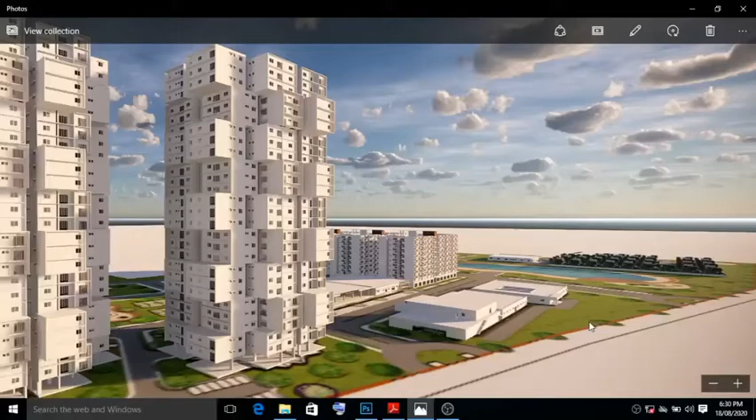Hi, I'm D. Revati. My thesis topic is Green Integrated Township. I want to start my topic with the need for the township.

A green building places a high priority on health, environmental, and resource conservation performance over its life cycle. Major innovations took place with the advent of the green building concept. To have a green building concept, we should look after the optimum use of energy power,

water conservation, solid and water waste management, its treatment and reuse, energy efficient transport system, and finally efficient building system planning. If all the buildings in urban areas were made to adopt green building concepts, India could save more than 8400 megawatts of power, which is enough to light half of Delhi or 5.5 lakh homes a year, according to the estimates by TERI.

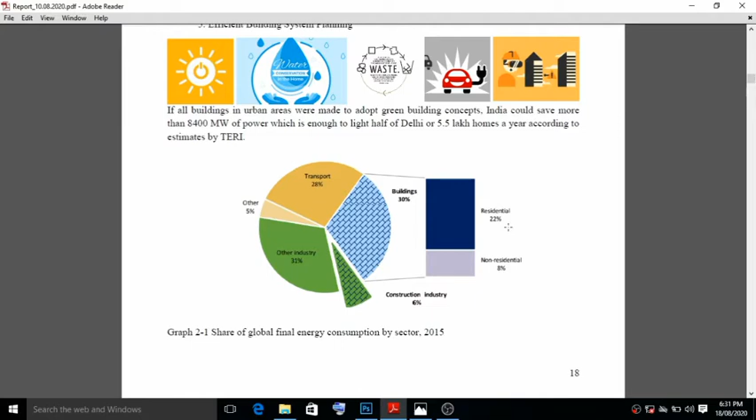This graph shows the energy consumption by the building sector is 30%, and most of it was occupied by residential. That is why my study focus is on residential, and non-residential is 8%. So further, we look about CO2 emissions.

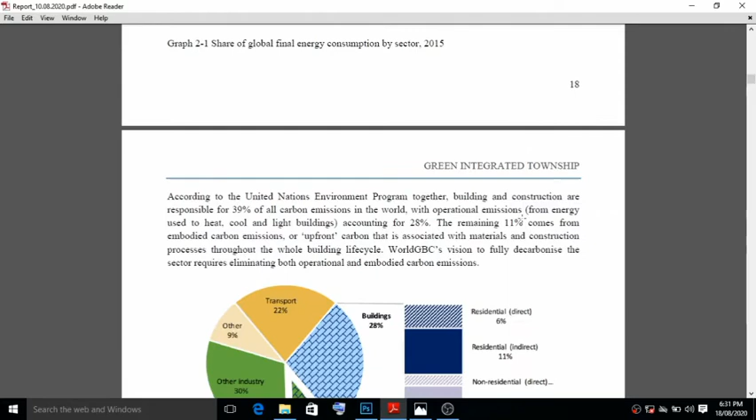According to the United Nations Environment Program, building and construction together are responsible for 39% of all carbon emissions in the world, with direct operational emissions accounting for 28%, and the remaining 11% coming from embodied carbon emissions, or upfront carbon, associated with materials and construction processes throughout the whole building life cycle.

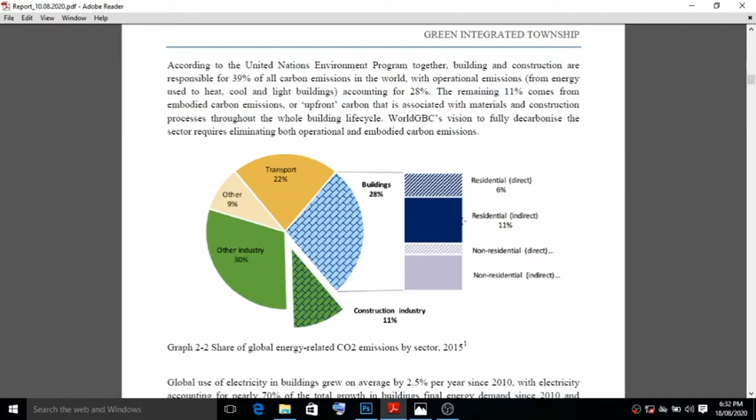This graph is the evidence for it, which shows the building and construction sector is responsible for 28% operational emissions, and 11% embodied carbon emissions in the residential sector.

However, when the building sector's electricity demand growth is accounted for, the net result is that building related emissions from upstream power have remained practically constant since 2010.

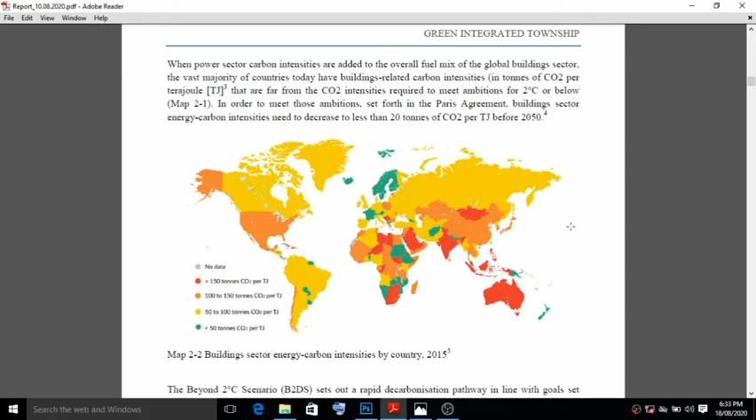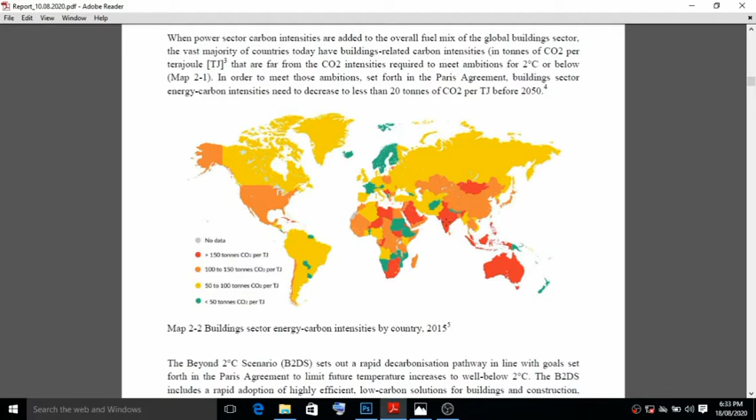There is a Paris Agreement with ambitions for building sector energy carbon intensities, which need to be decreased to less than 20 tons of carbon dioxide per terajoule before 2050. But in this map, it is recorded that the energy carbon intensity in India is greater than 150 tons carbon dioxide per terajoule, which is a serious condition.

So they came up with the 'beyond 2 degree' scenario, which is achieved by low carbon solutions: adoption of highly efficient and low carbon solutions for buildings and construction, widespread application of building energy codes, broad scale renovation of existing building stocks, aggressive deployment of high performance technologies, and a strategic shift away from fossil fuel use in buildings.

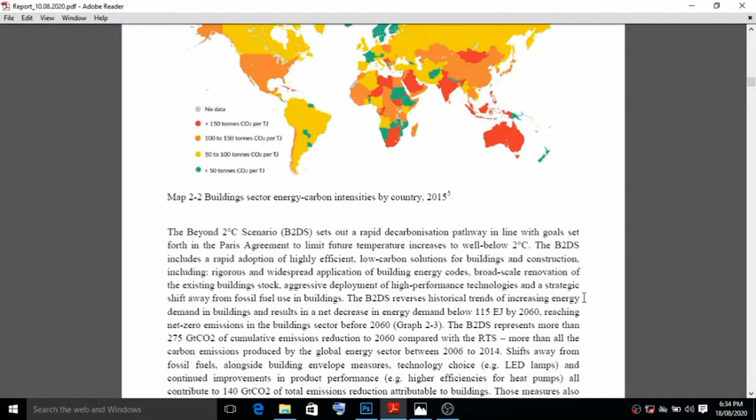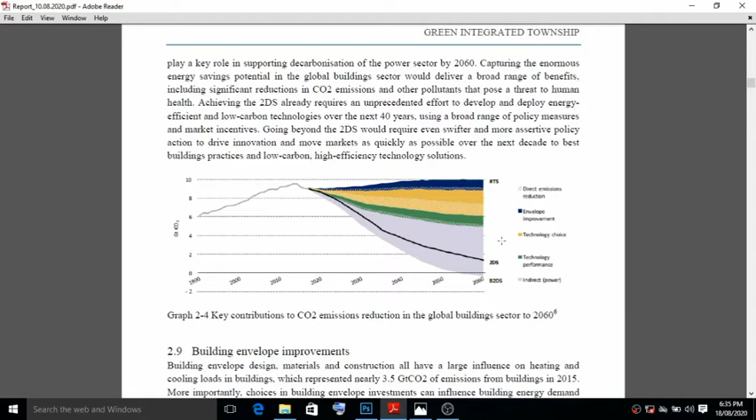So the first one is building envelope improvement. Building envelope design, materials and construction all have a large influence on heating and cooling loads in buildings, which represented nearly 3.5 GT of carbon dioxide emissions from buildings in 2015.

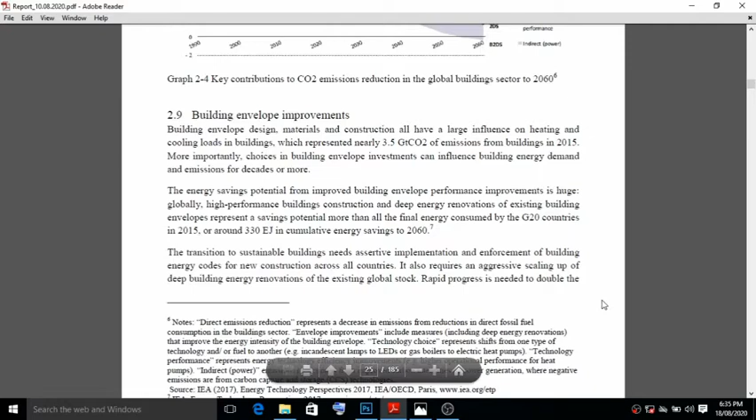So the transition to sustainable buildings needs assertive implementation and enforcement of building energy codes for new construction across all countries. It also requires an aggressive scaling up of deep building energy renovations of the existing global stock.

Then the technology choice - there are two things. First of all, we look at technology choice importance, which has a ripple effect on the type of energy and the total energy consumed in the buildings.

So there are two graphs showing final energy used by equipment type and equipment shares - the amount of energy savings due to equipment type over the years. In 2014, energy usage was due to higher percentages of fossil fuel equipment, conventional electric equipment, while efficient electric equipment was much lesser, and district heating and cooling and renewables were much lesser than conventional electric equipment.

This was totally changed with the vision of 2060: to reduce fossil fuel equipment by a lesser amount, and also conventional electric equipment, while using efficient electric equipment in greater amounts, and also district heating, cooling and renewables at higher levels.

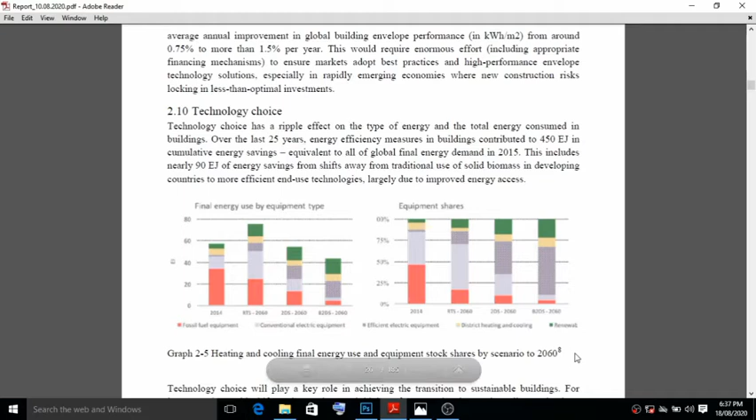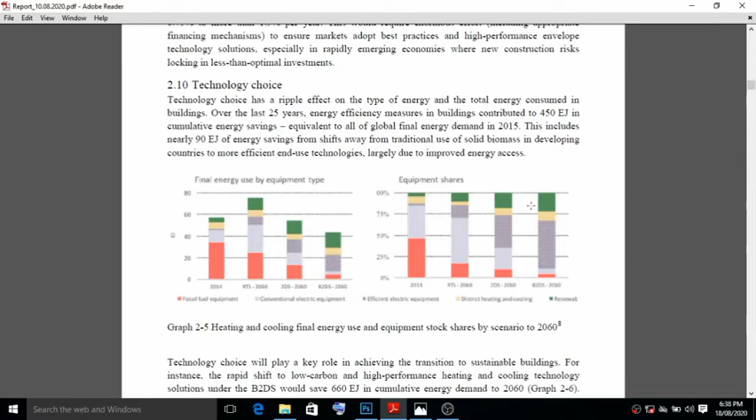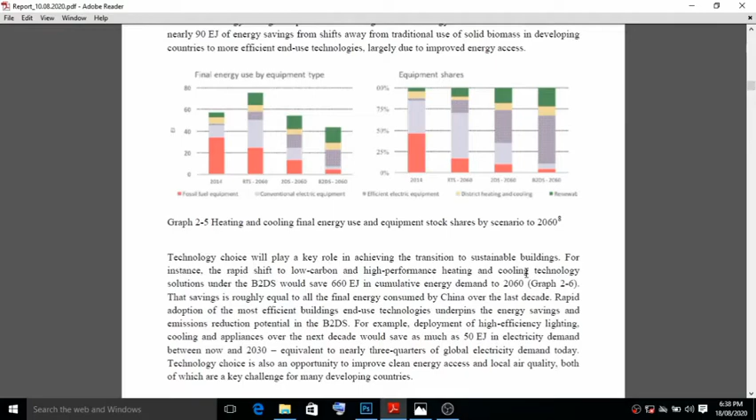This is the technology choice they have chosen to achieve the below 2 degrees Celsius scenario. And finally, the technology performance.

Improving technology performance is a key component of the transition to sustainable buildings. Efficiency improvements, including building envelope measures, represent nearly 2,400 EJ in cumulative energy offsets to 2060, more than all the final energy consumed by the global buildings. Yet concerted effort is needed to support research and development, best practice sharing, and international collaboration to accelerate the development of better building technologies and bring them to market at affordable prices.

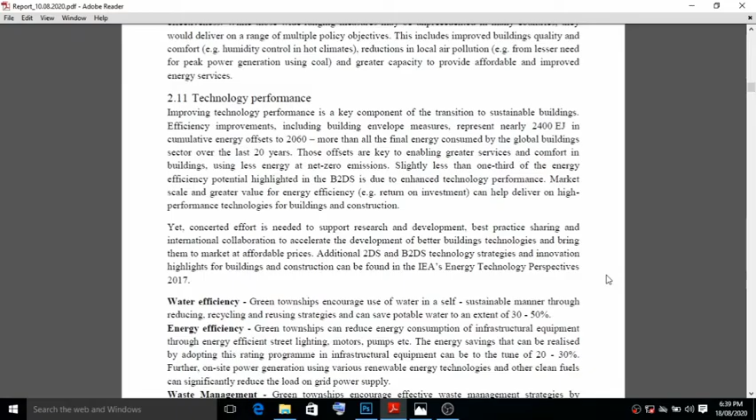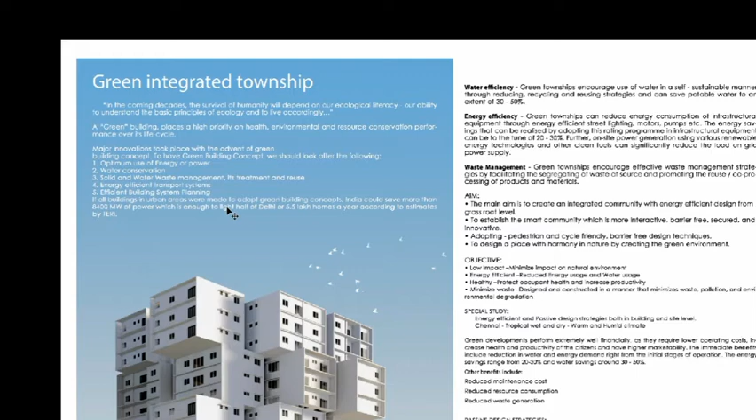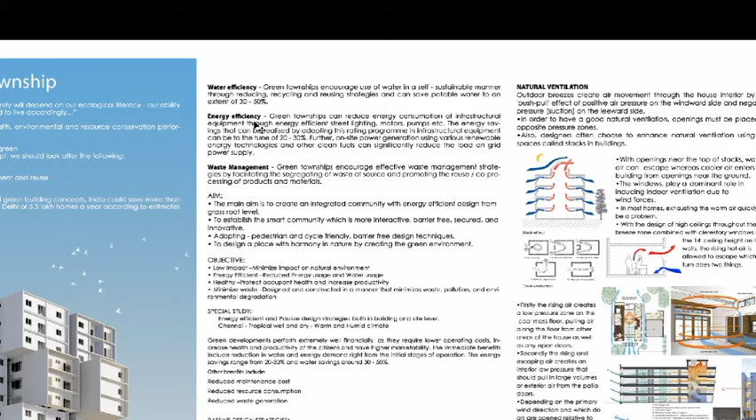In the coming decades, the survival of humanity will depend on our ecological literacy and our ability to understand basic principles of ecology and to live accordingly. So in a green building, there are three major things usually: water efficiency, energy efficiency, and waste management. If we solve these three things in our design, it is considered a green building concept.

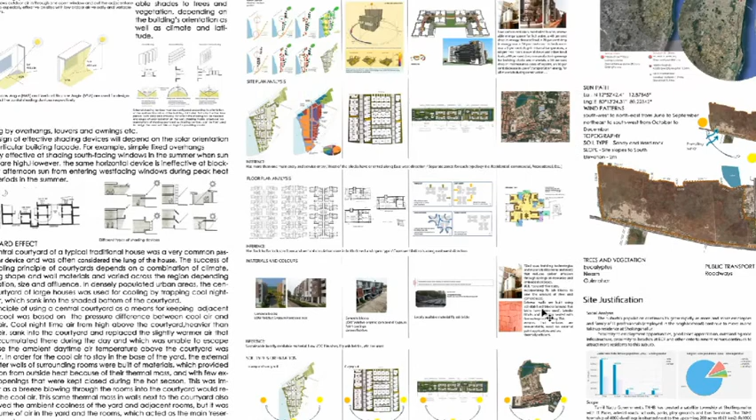So next we move on to comparative analysis of case studies. I have done 4 case studies: ITC Bhadrachalam, Andhra Pradesh; BCIL TZed Homes Bangalore; ETA Tech City at Sriperumbathur; and Luxury Villas at Kolapakkam.

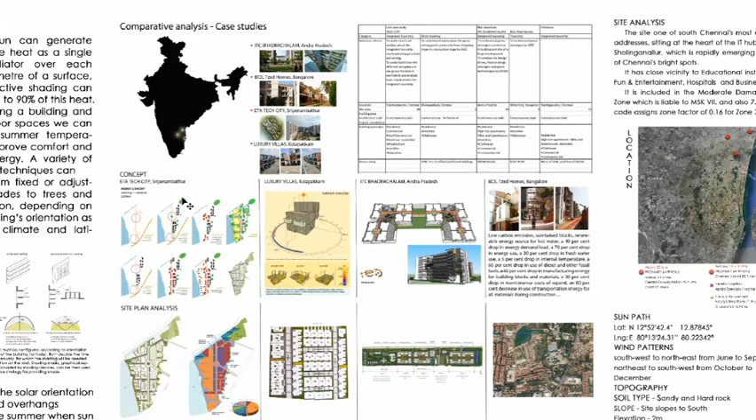ETA Tech City at Sriperumbathur is an 82 acre project, and the concept is based on the neighborhood principle. They created a path, an entrance and a central node, and a green landmark, then the districts of residential and commercial buildings, then a luxury villa district, a luxury residential district along the lake, and finally a neighborhood. Each neighborhood has a central green space. This is the concept of ETA Tech City.

The luxury villas have a good amount of natural lighting, up to 108 lux, which is more than enough for vision, enough to light a space, and a good amount of cross ventilation is carried out in all the floors. This was the concept of luxury villas, and it is a green rated building, IGBC green rated, gold rated building.

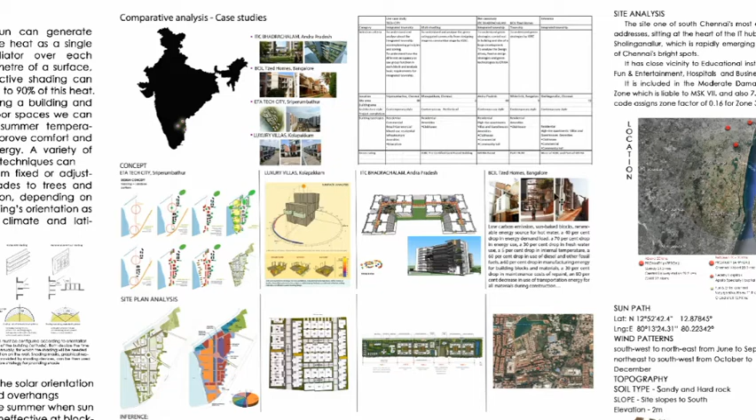BCIL TZed Homes Bangalore uses low carbon emissive materials, and it is a zero water site where they don't need water from outside. They use their own water, recycling, reusing and harvesting it in a whole cycle. They don't need extra water from outside - that is the specialty of this site.

Site plan analysis: since the site area is bigger, almost all the site has 2 entries and a service entry. All the major roads and wide roads are always aligned on the north-south orientation, and the blocks were oriented on the east-west direction, so that the longer facade faces north and south, and the solar radiation exposure of the vertical surfaces on the east and west is lesser, so the cooling effects for cooling the space is lesser.

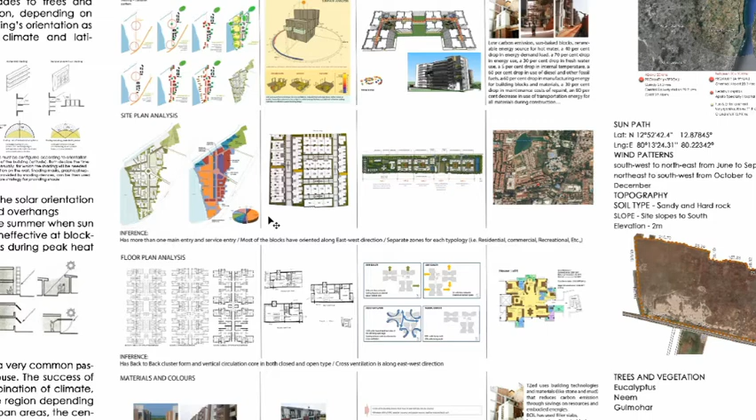Floor plan analysis: the blocks are designed as a back to back cluster with a vertical core in both open case and closed type case, and the blocks were oriented east-west also to channelize the wind direction, where the wind direction is from west to east. So on all the plans.

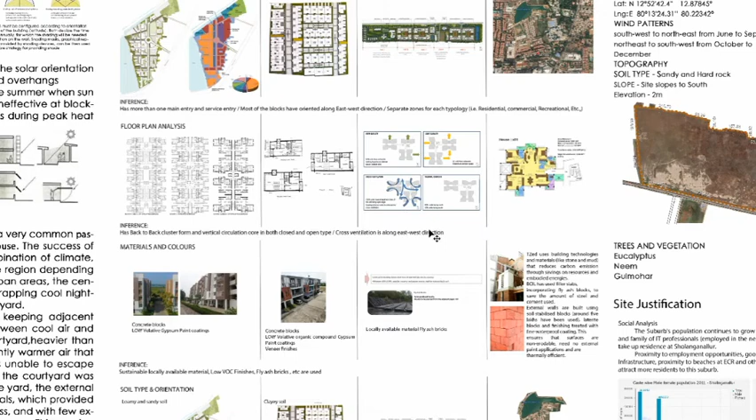Materials and colors: they have used sustainable local materials, low VOC and fly ash bricks, which have low transmittance of solar energy and low U value. In the site they have used low carbon emission materials, fly ash blocks, and low volatile organic compound gypsum paints.

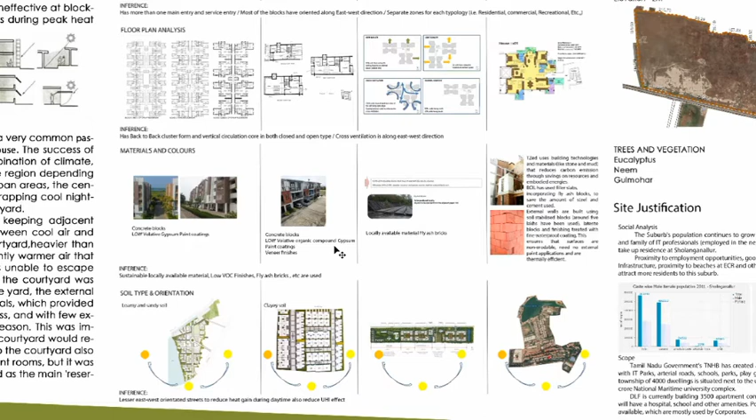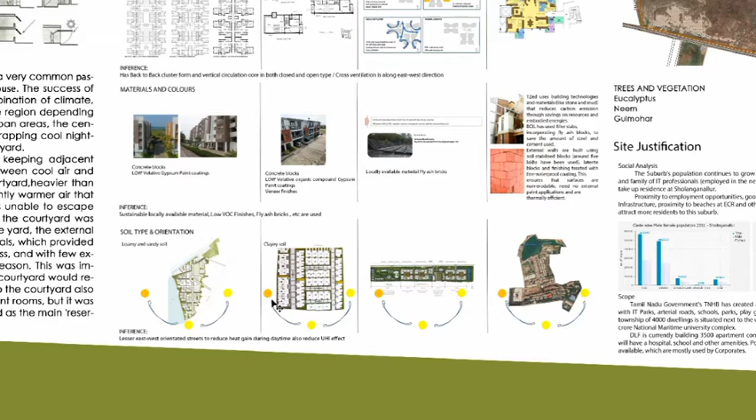Soil type and orientation: the site streets are oriented, as I said, majorly north and south direction, with lesser east-west oriented streets to reduce the heat gains through those streets. This also has an impact on the UHI effects. This is a very major point from the soil type and orientation.

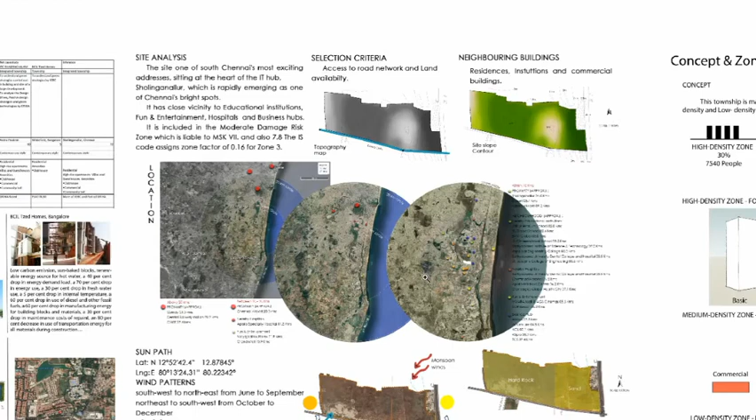Site analysis: the site is one of South Chennai's most exciting addresses, sitting at the heart of the IT hub, Sholinganallur, which is rapidly emerging as one of Chennai's bright spots. It has close vicinity to educational institutes, fun and entertainment, hospitals, and business hubs. It is included in the moderate damage risk zone, liable to MSK 7 and also 7.8. The IS code assigns a zone factor of 0.16 for zone 3, and the selection criteria is land availability and access to road network.

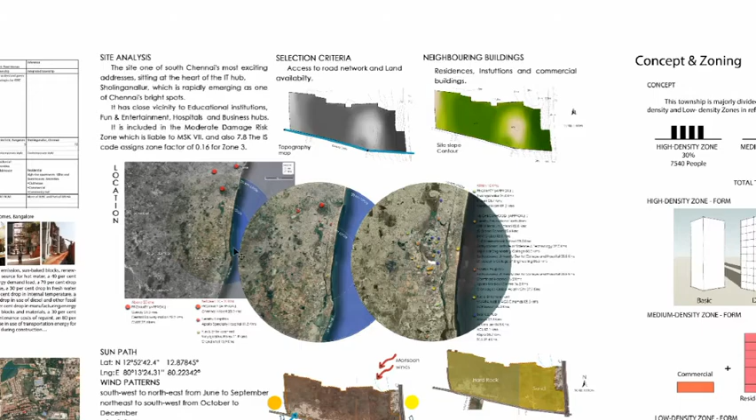This is a 20 kilometer and 10 kilometer circle from the site.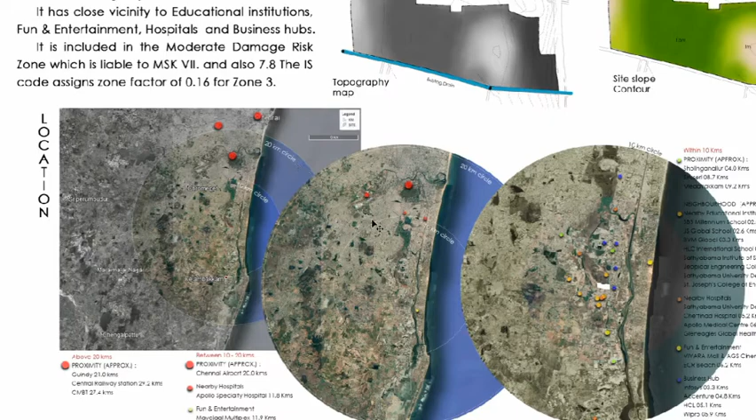So we have Guindy and Central Railway Station, CMBT and Central Railway Station outside the 20 kilometer circle. And inside, in between the 10 and 20 kilometer circle, we have airport and Guindy Junction, and also Apollo Hospital and fun and entertainment.

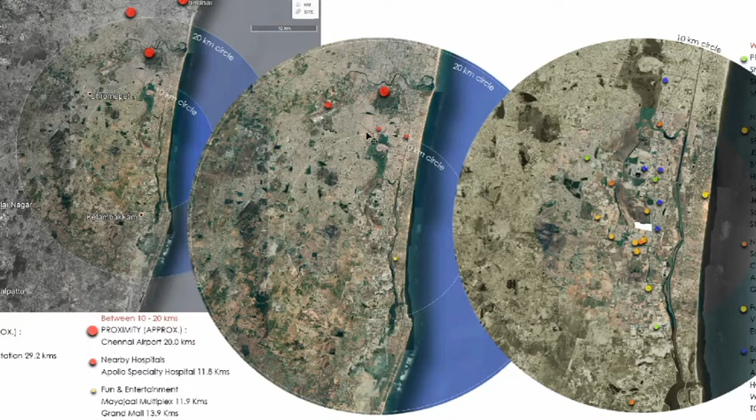Inside the 10 kilometer circle, we have junctions like Sholinganallur, Medavakkam, and Siruseri. And this is the site. White is the site. And there is fun and entertainment like Vivara Mall and the ECR beach.

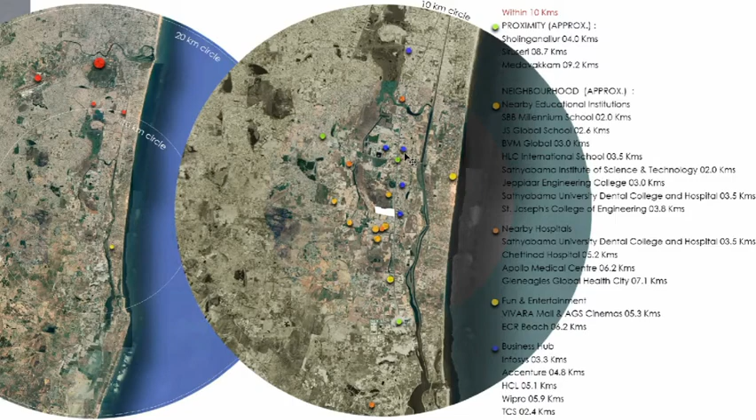So Sathyabama universities are there, and the schools, orange color are schools, which are SBB Millennium, JS Global School, BVM Global School, HLC International School, in 2 to 4 kilometers, and there are business hubs, Infosys, Accenture, HCL, Wipro, and TCS near it. This is a plus point for them, for a township.

This is the topography of the land, and there is an existing drain throughout the internal road. This is an internal road which leads to the site, and this is the main road. And this is a slight site slope. These are the lower points in the site, and these are higher points in the site.

So I have not changed the natural site slope in the design. Instead, I just raised this corner because getting the site drains into this corner is no use. So I will raise this slope up and make this only as the lowest point in the site, and get all the water from the site collected here and created a pond here, and the pond acts as a recharge pit.

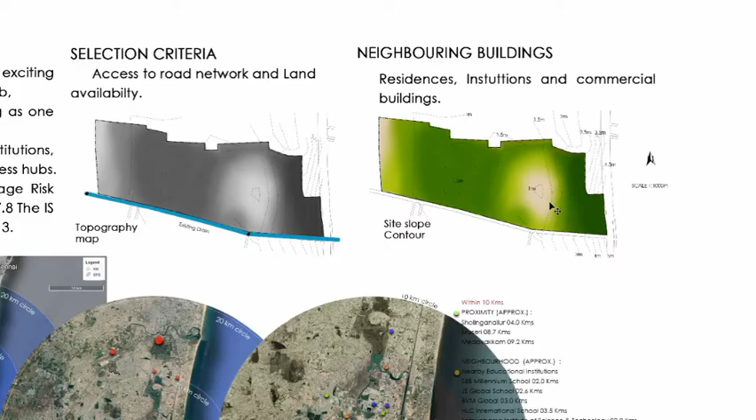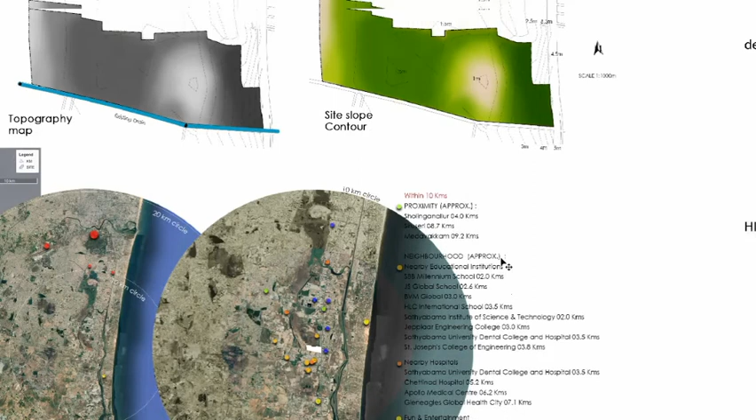And since it has sand, you can see it has sandy soil here and hard rock here. The pond comes in the sandy soil, so it is easier to penetrate inside. So after that, excess water will be drained into the existing drain through a culvert or a pipeline below.

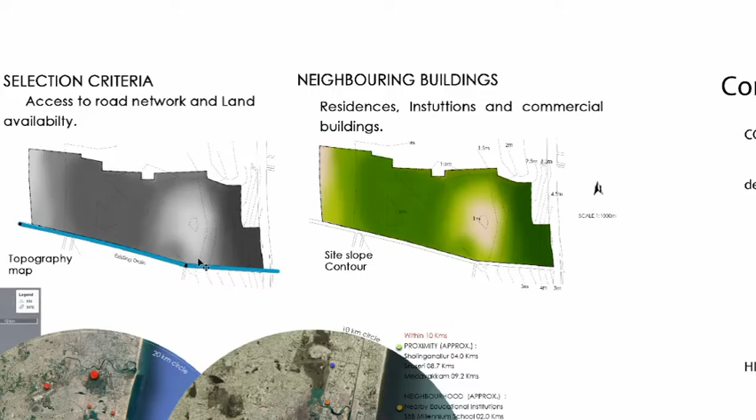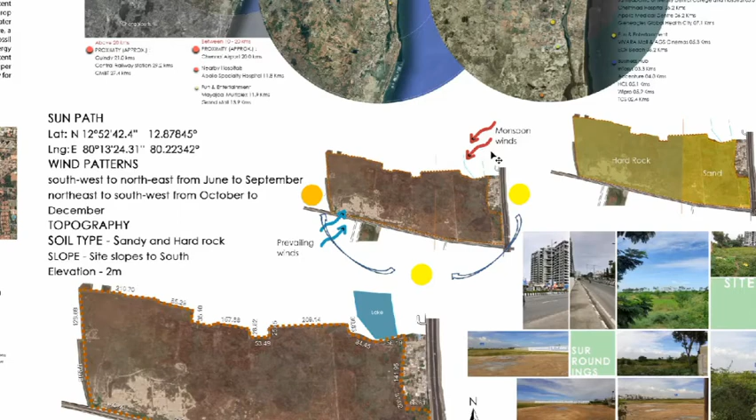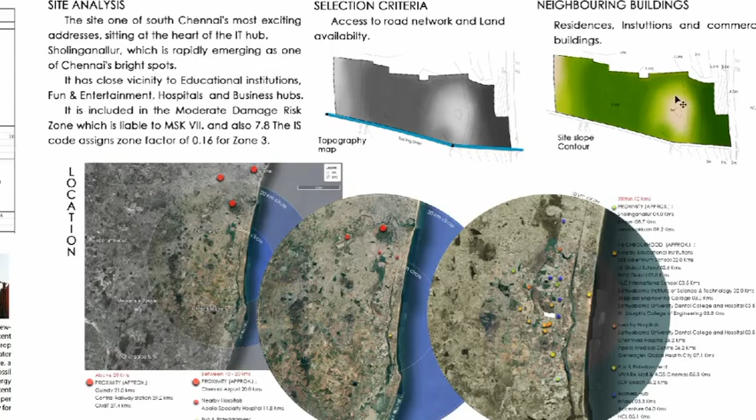Sun path is east to west along the south, and the prevailing wind is from southwest to northeast, and the monsoon winds were from northeast to southwest. And elevation is 2 meters, and slope, as I said, two low points are there, and we have treated with an idea. And trees found are eucalyptus, neem, and gulmohar.

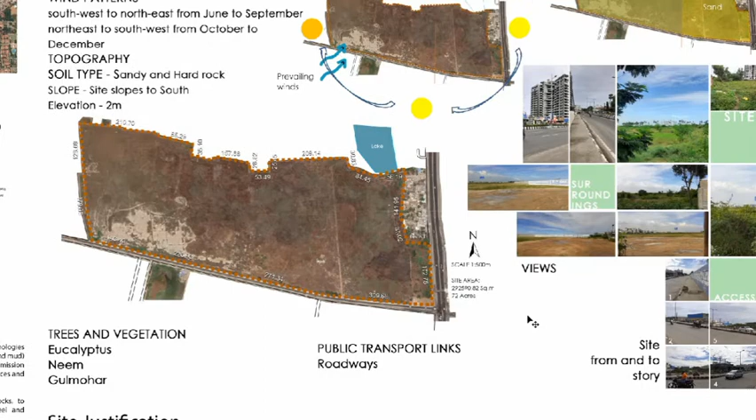So these trees were planted for the new proposal also, to not disturb the topsoil. If we provide the same vegetation which exists, the topsoil won't be disturbed, which retains the mother earth.

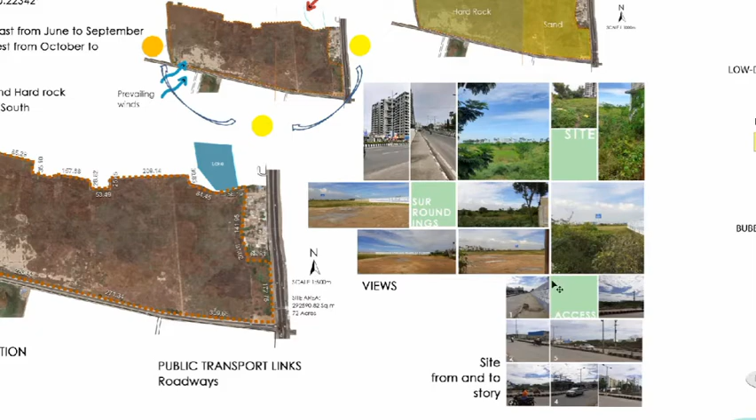So these are site surroundings, and these are the site, and these pictures are access to site from and to story.

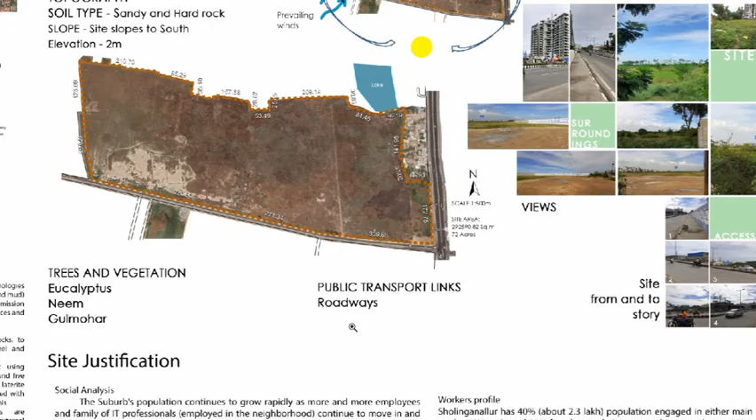So for a township in Sholinganallur, for the site justification, I have analyzed social strategy, scope, and workers profile, and also the literacy. So in a social analysis, there is a population increase in the male and female population over the years. So this is total population.

In the total population, there are more number of Hindus, and then Christians, less than Hindu. Yes, there are Christians, and less than Hindu and Christian there are Muslims, and least is all of others.

And there is a scope for the site for the residential project, because there is an upcoming Tamil Nadu government's TNHB satellite township with IT parks, RTL roads, schools, parks, playgrounds, and bus terminals.

And also there is an upcoming building currently which is built by DLF currently, which has a 3,500 apartment complex.

So workers profile. Sholinganallur has 40% population engaged in main and marginal works. Male 59 and female 22 population are working population. There are non-workers also.

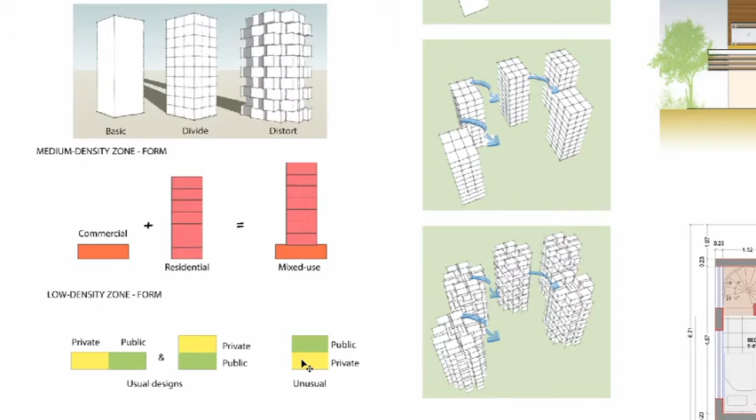The grouping concept of the high density zone is based on the wind flow. With the wind flow, natural ventilation at the site level, alternative placing is the best option. I have placed it alternatively, and by creating a central open space used for communal interaction, a playground and gathering space, which will give a good view and good ventilation, with an enormous amount of airflow, and it will be equal walking distances from all the towers.

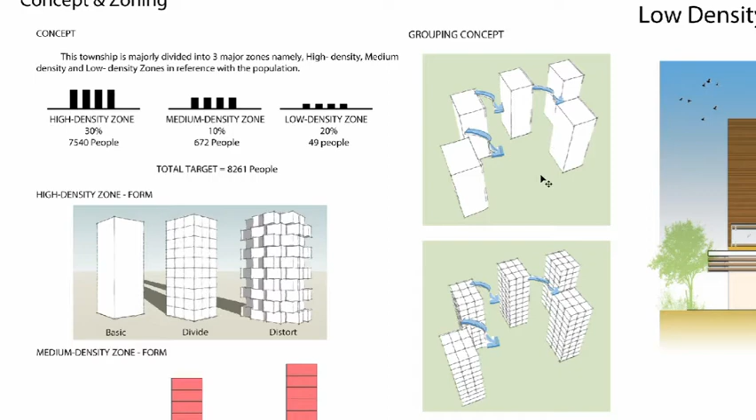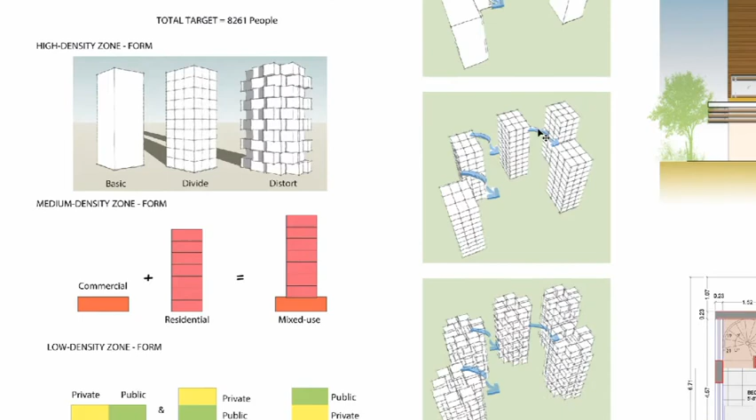So this is divided form. This is how the divided form looks, and this is the basic form, this is divided, and this is the distorted final form. So this is how it is placed now.

So this is the bubble diagram. There are 3 entries, 2 main entries and one separate entry for the low density block. I haven't included it since it is a secondary entry, and there is a separate service entry.

From the main entry, we have entry to the community hall, low density block, economically weaker section, and medium density block, high density block, parking, healthcare, boutique, supermarket, office and business center, daycare, clubhouse. The service entry gives way to parking, AC plant, sewage treatment plant, and EB yard.

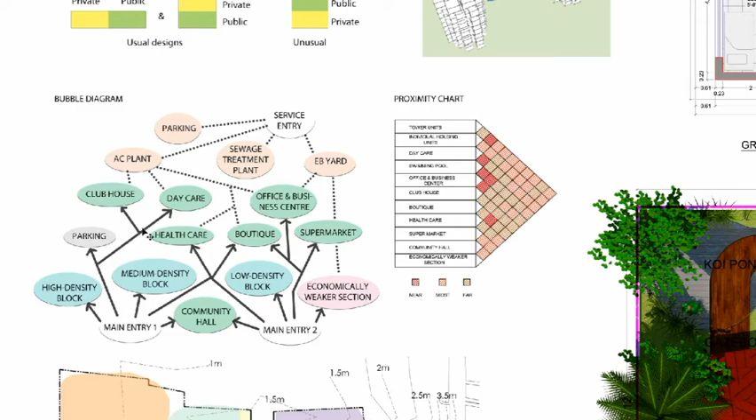These services like AC plant, sewage treatment plant, EB yard have connections to the services of the residential zone, which are amenities. With the proximity chart, I have come up with the zoning.

Since we have a lesser distance on the main road, abutting the main road, I have given the main entry through the secondary road, since the traffic also will be lesser, and it will be easier to divert them from the secondary road.

Since I am creating a pond and a retention pond here, I have given it as OSR, 10% here. From the main entry, we have access to the community hall, health center, supermarket and boutique, daycare, clubhouse and business center, medium density zone, and then EWS, and also the high density zone and clubhouse.

And to the low density zone, it has a separate entry from the main road to reduce the distance from the main entry to the low density zones, since the site slope is not changed due to the collection of rainwater here.

It is a very big long road to get into the low density zone, so a separate secondary entry is given here, and there is a service entry from the main road, from the service lane. There is a service lane in the main road, which helps for the secondary entry and the service entry, and all the services are lined up at the back to service the facilities in the township.

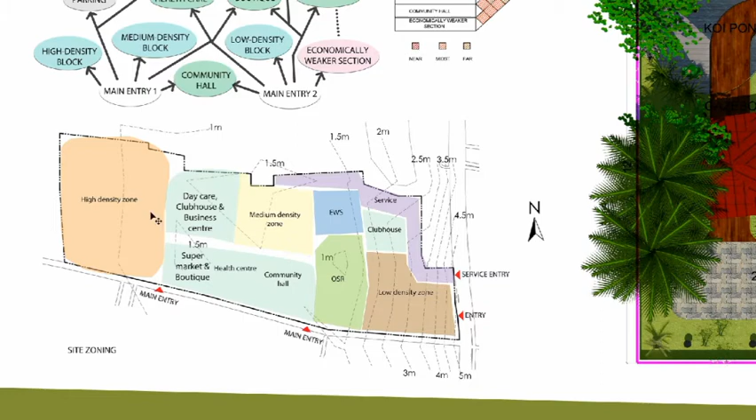This is the site plan of a plot in the low density zone, which is 18 meters by 12 meters, and they have two separate entries, pedestrian and vehicular entry with a ramp and a step. The ramp leads to car parking, and there ends the driveway, and the pathway leads to a gazebo and koi pond at the backside, and again with a stepping stone they can come into the entrance of the building.

This entrance is for the staircase. Here they step up for a staircase to enter the public space on top, and they have a covered, semi-covered dining space and a terrace here. So that's it, we'll go on to the plan.

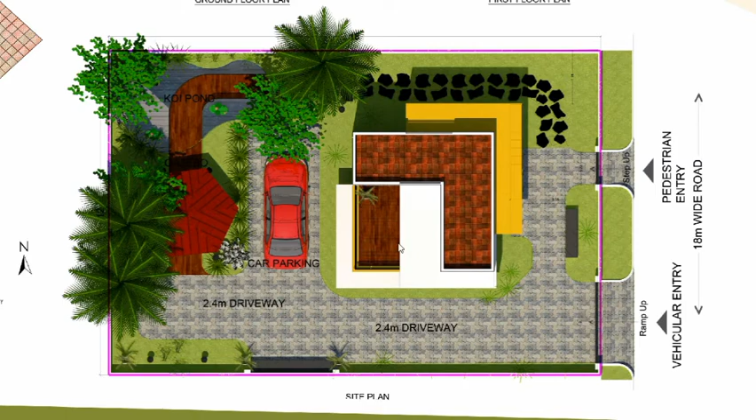So this is the ground floor. This is the private space with a circular staircase from the first floor, and it has a sleeping space, a studio space, and a bathroom, and it is below the ground level at 4 feet, so 1.2 meters below the ground floor.

On the first floor we have the step entry from the ground level, and we have a seating here for the visitors, and a shoe rack below it, and we have a living area and then a kitchenette next to it. When we come outside, we have an outdoor dining area.

There's a long window to just push up and use the kitchenette together, not to come across the living area all the time. This is given.

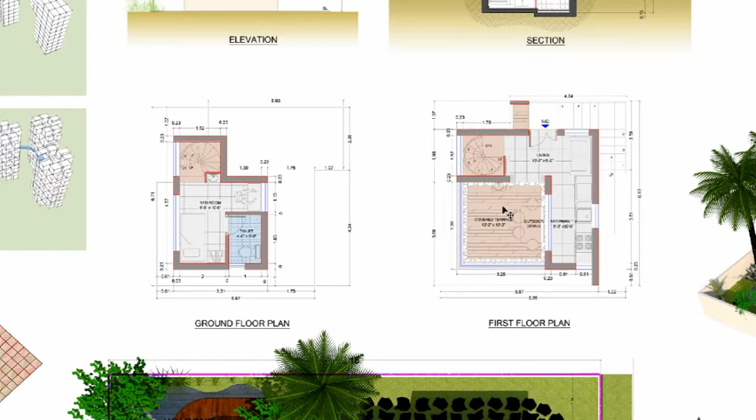Then the spiral staircase leads to the private space downside, and there's a pebble bed all over the covered terrace to get the rainwater collected, and there is a raised deck here, and this is the elevation.

Gray painting is given to highlight the dining area, and wooden louvers are created for the shading of the windows and ventilators for the private space. The spiral staircase area is highlighted and emphasized with wooden cladding.

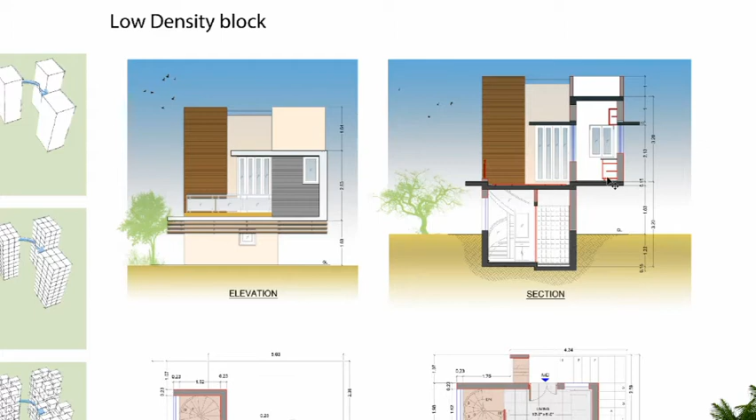Similarly, a French door is given. There's a deck floor and pebble bed all around, and there's a spiral staircase and wash area here, and the toilet space is here, and kitchenette cabinets are here. There's a long window to access the kitchenette and the dining area simultaneously.

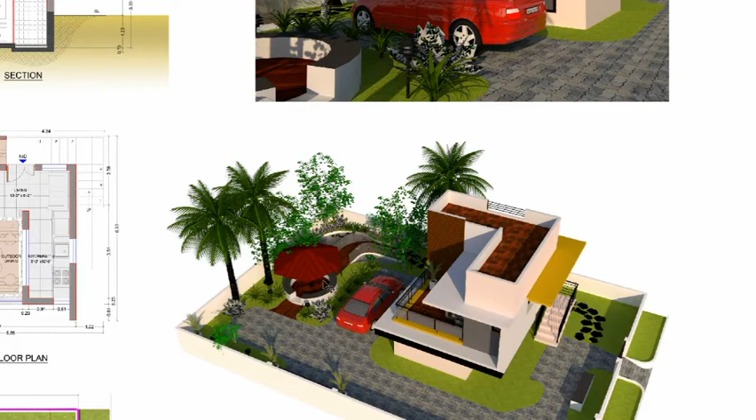And there's a car parking, and there's a gazebo with seating, and there's a koi pond here, and a pathway goes along through it to enjoy the koi pond.

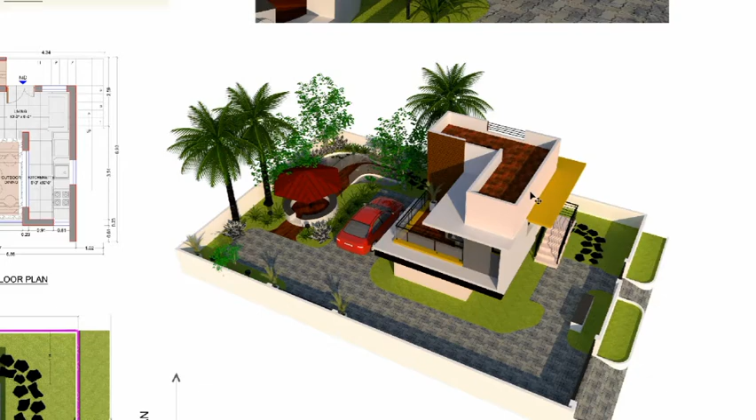And this is a staircase which leads to the public area upside. So this is the main door. This is the kitchen, sorry, living window.

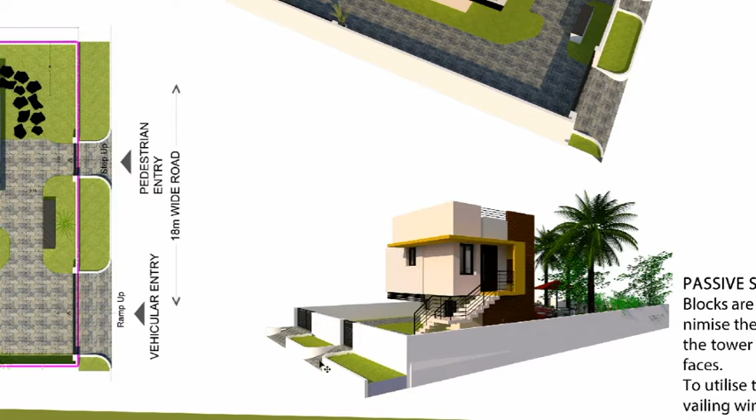This is the staircase which leads to the main door, and this is the pedestrian entry. This is vehicular entry. Gazebo and koi pond and other landscape features are here.

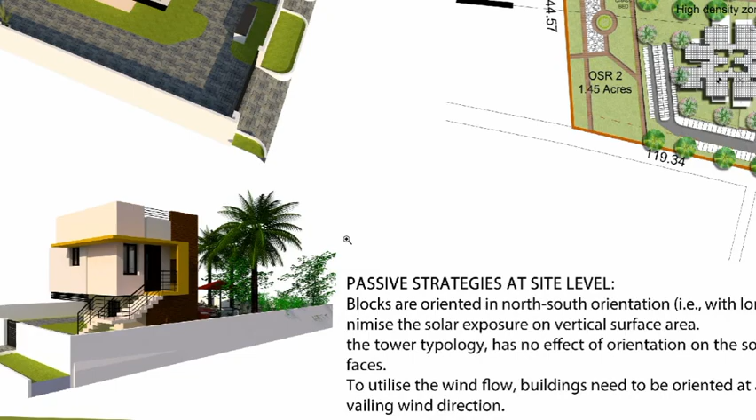So now let's look at the site plan. We have main two entrance plazas and a secondary entry here and the service entry here, and there's a community hall.

With a paved area and a planting area. The planting is done separately for each street, and all the streets look unique with trees planted.

Since this area is planted with gulmohar, and these are planted with copper pod. The main road is planted with copper pod to welcome all the people with the yellow bright flowering trees.

And here gulmohar red is planted to have a different color commercial space. And inside we have given neem and eucalyptus.

Eucalyptus are given along the swale areas and water content areas where you collect the water of the site. So there is a slope here, this small swale which leads to this water pond.

And there are drains all along the streets to collect all the rainwater and get them into the pond. And the excess water is let out using a culvert to the main existing drain.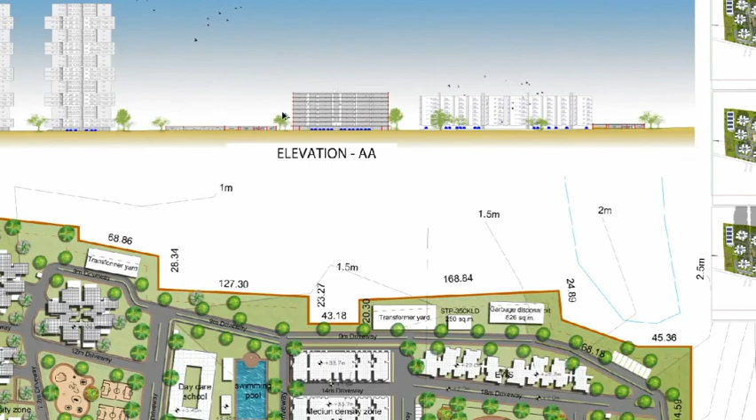This is the elevation of EWS, and this is a clubhouse. This is a medium density zone section, and this is clubhouse, and this is office, and this is high density zone tower.

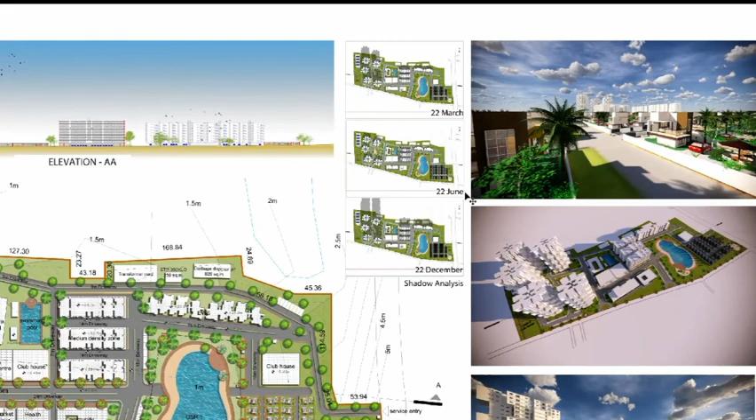And parking below. And this is a site shadow analysis. So most of the site, in front, doesn't have shadow throughout the highest peak hours of the sun.

Except two towers in front and one tower in the medium zone. All the other towers and the blocks enjoy the shadow of the front towers.

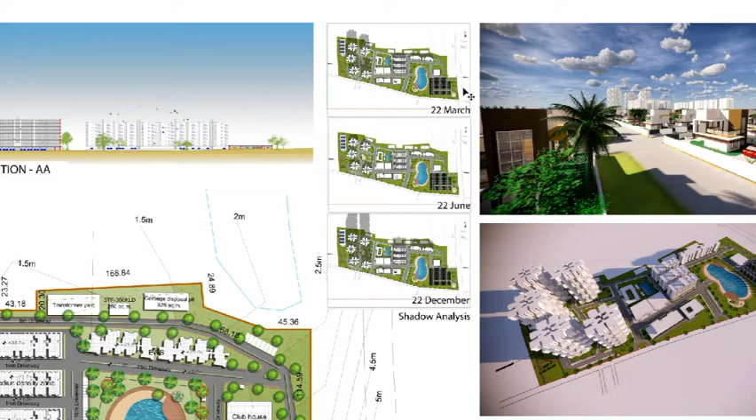So during peak hours, peak times of the sun, 60% of the roof area was allotted for the solar PV panels and solar water heating systems. Insulated roofs were used to cool the interior space and reject the solar radiation getting inside the room. This is during summer solstice, winter solstice, and the equinox.

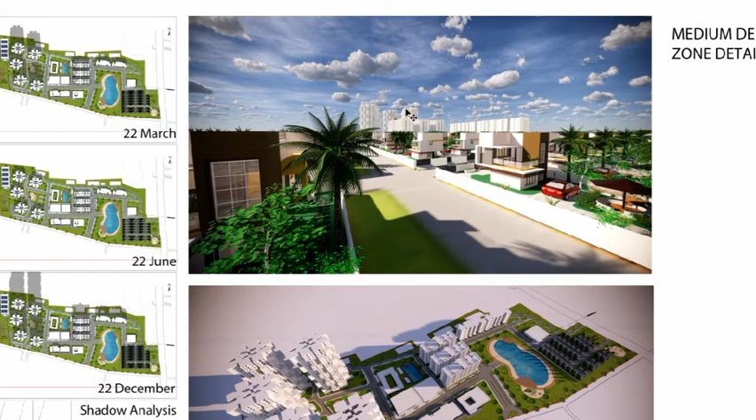This is a view from the low density zone, and this is high density towers, medium density blocks, EWS, and these are low density zone. This is overall site view with a pond and OSR and EWS.

We have swimming pool, daycare area, supermarket and boutique, community hall, healthcare center, and clubhouse, and a central play area for the high density zone. There's a low density zone with a separate entry, and a separate entry for the services - the main two entries. So this is the site view.

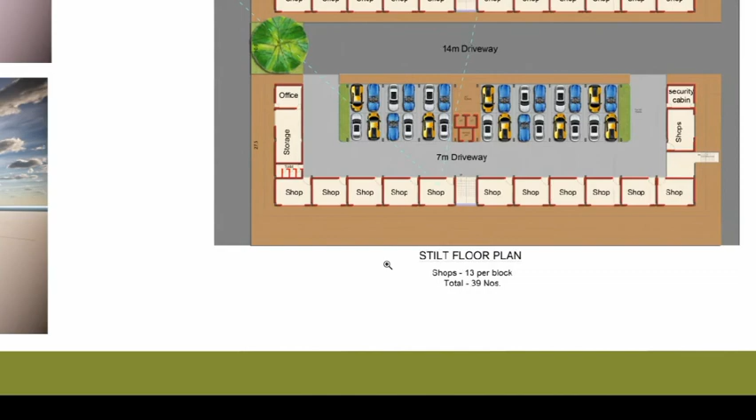So next let's move on to medium density zone. This is the ground floor. These are main roads, this is service road, this is the main road, and we have parking from the main road on one side, and all the other three sides have shops and security cabin, office, storage, and toilets.

The storage and the office is lined in the western side to have the facility of a service lane to them. Loads get unloaded here and transferred to the storage here, and there's a lift space for people, and two staircases to access the upper area, and these are long pavements for the commercial space.

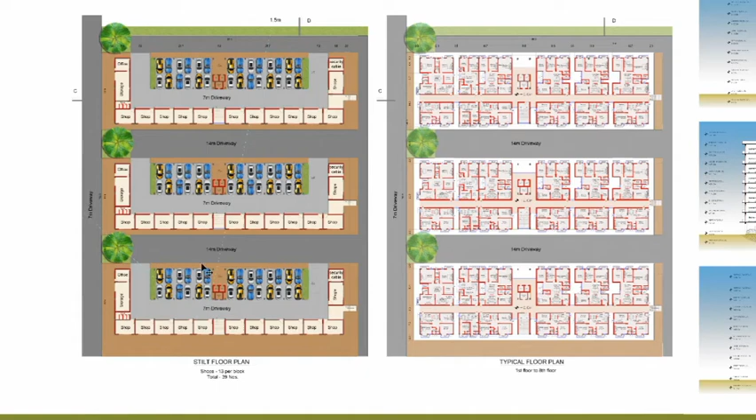That's it. There's a planting area in between. This gives a very unique feeling, a unique interactive space - it creates a unique interactive space inside the township.

Usually townships will be very vast, and there won't be people gathering frequently. But this street won't look like a street of a township - it will be interactive and active always. So this creates a good active space always.

And it rejects the spaces which are unused - mostly the spaces in a township will remain unused, and the design goes on the negative side because of that. So that won't happen here.

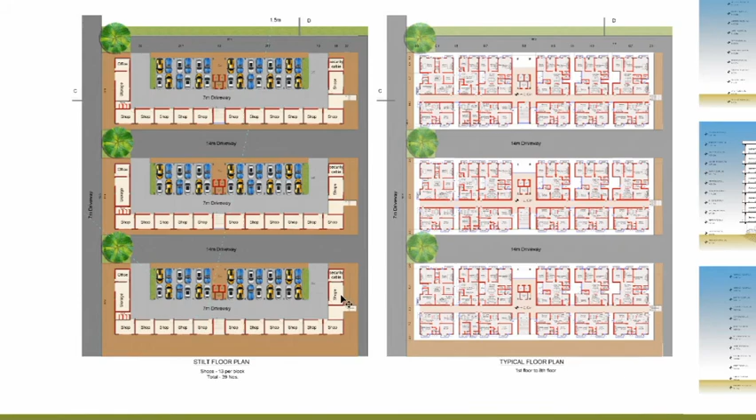So each shop has a service entry at the backside and the main access from the pedestrian at the front. So this is the typical layout for the medium density zone.

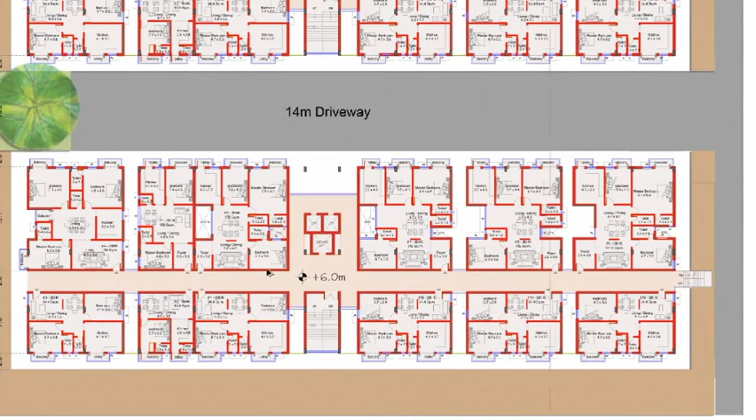So we have a service core here, there is a service lift here, and main importance is given to the service lift, and the other lifts are located on that side. The corridor leads to 12 blocks, 12 units with 3 BHK, 2 BHK, and only 1 BHK flats, and there is ventilation through the corridors also.

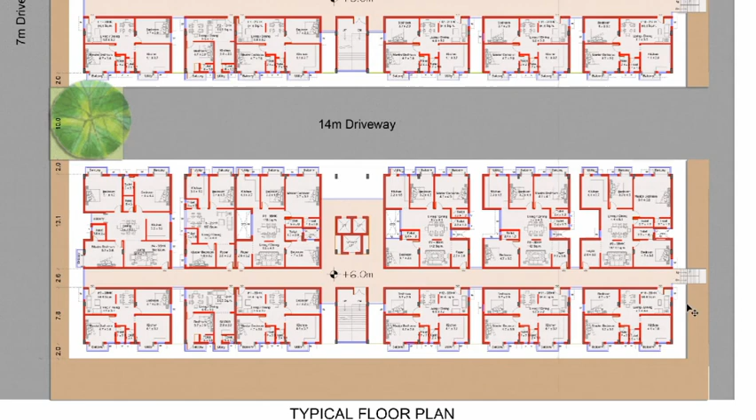This is a fire exit staircase, and on this side we have 3 BHK, two 3 BHK units, and three 2 BHK and 1 BHK flats.

So from this we have living and dining, a kitchen, bedroom, common toilet and utility, and a master bedroom with an attached toilet and a balcony for them.

And this is a single bedroom flat which has living and dining, a kitchen, a toilet, and utility, and then a bedroom with an attached toilet and a balcony.

Coming to this 2 BHK flat, we have living and dining, bedroom, kitchen, and master bedroom with attached toilet and balcony, and we have a utility for kitchen and a common toilet.

On this side we have living and a separate dining with a balcony space for ventilation of the dining area. For the living we have ventilation through window, and for the master bedroom we have ventilation through balcony, with an attached toilet. We have a kitchen here, and another two bedrooms - one with an attached toilet and one with a common toilet, and a balcony for each.

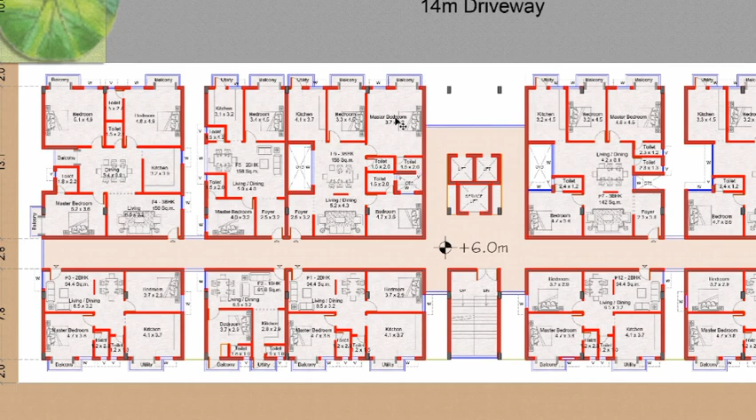An OTS for ventilation of the toilets and the plumbing pipelines for the toilets, and there is a big OTS for the ventilation of dining. There's a master bedroom and kitchen.

Moving on to this, these are typical layouts, one with OTS and others with openings, large openings. This is also a typical layout which has living and dining with a simple partition.

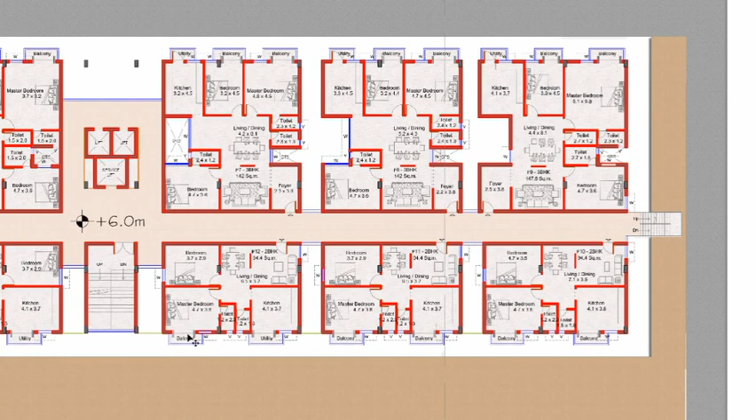And a bedroom and master bedroom with an attached toilet and balcony, and a kitchen with utility and a common toilet. That's all with the medium density zone.

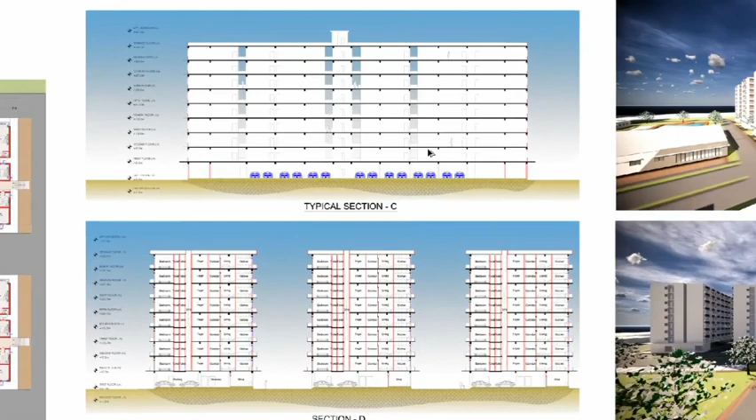This is the longitudinal section of the medium density zone. There's openings on all the corridors, and there's parking in the basement, and there are shops here, and these are driveway.